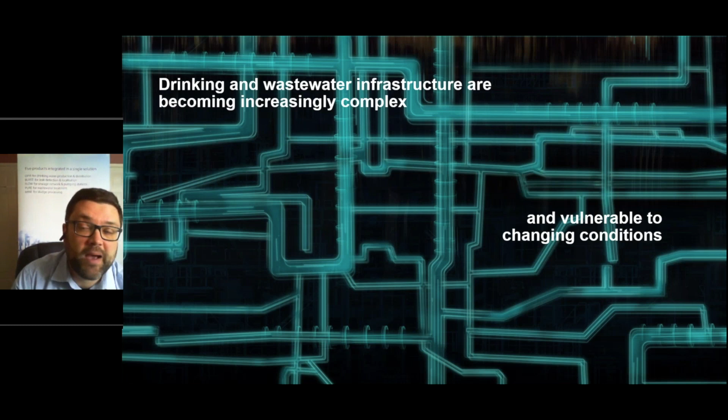And if you couple in the effects of climate change, such as drier summers, often shorter, sharper, more intense rainfall events, all of this change becomes more and more difficult to manage and to understand. Coupled to that, it's becoming more and more difficult to get skilled operators.

I visited a treatment works not long ago, and there was a guy in that treatment works who'd been working there for over 30 years. And he knew everything about that treatment works. His knowledge, his understanding was fantastic. What we don't see now is people coming into the water utility market and into those type of roles who are willing to spend 30 years on the same wastewater treatment works.

People like variety. The younger generation are starting to crave the ability to move from role to role and use those transferable skills, which is great. But what it does mean is that your skilled operators, people who are willing to be there 24/7, working nights, working days, working weekends, are more and more difficult to find.

Particularly now, I heard statistics the other day saying that a quarter of the workforce for some utilities in the UK are self-isolating at home. It becomes more and more difficult to ensure you've got resilient operations with these conditions and with this changing workforce.

We see research saying that over 50% of water professionals will retire in the next 3 to 5 years. It's becoming more and more of a challenge to take those people you've got now who are operating your processes really, really well, and ensure continuity into the next generation. So 5 years time, 10 years time, where are we? How do we ensure that all the good things happening now are also happening in the future, plus additional benefits from data and IoT sensors and so on?

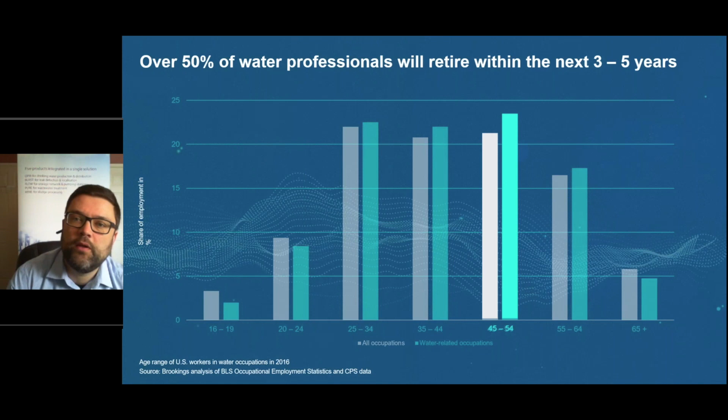So you've got all this data, you've got more and more data. People talk about IoT and the fourth industrial revolution, all these other concepts. Water utilities have got masses of data. They've got data going back 20, 25 years, and some really, really good data. The difficulty often is that data is siloed.

So you have data over here, which sits with the wastewater networks people. You've got wastewater treatment, you've got drinking water networks, you might have leakage departments. You've got all these different parts of water utilities. There's a real need to bring this data together. So if you know when people are using drinking water, that in turn helps you understand better when your treatment will be required for wastewater.

So how can you bring all these solutions together? How can you make the best use of all these new sensors people are putting out? And how can you adopt that technology to help you preserve the knowledge we've talked about when your operators reach retirement or become more difficult to find? How can you do that?

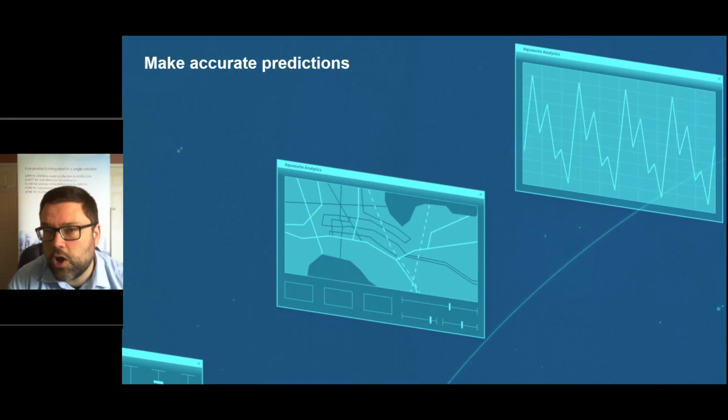And what we see is the concept that we coined however many years ago of that virtual operator, that software package, which can bring together the domain knowledge from the operators, the software expertise from the developers, the AI understanding from the data scientists. It can build up those rapid connections. It can start to make predictions of what's going to happen, and it can help you anticipate changes. So you can see that consumption's changing. You can see that the levels in sewers are starting to change.

You can see that your treatment process is becoming more unstable. If you've got that virtual operator, that whole concept of somebody or something being able to predict what's going to happen, anticipate when things will change, and give better insights to operate the network, but also be able to automatically react to those changes, that will give you a massive step change in resilience, performance, and efficiency.

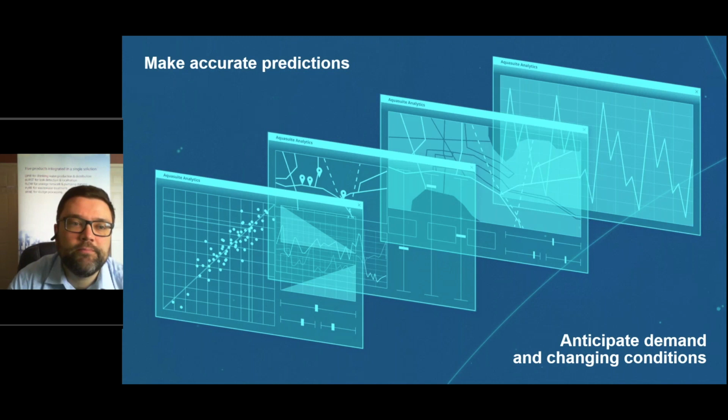Within the AquaSuite team, most of us are water people, so we're very passionate, and we believe that data-driven solutions can move and can help people get to that really resilient, reliable, efficient infrastructure. And that's the goal that we have, to help water utilities move along this journey to ensure everything stays exactly as it is now, as good as it is currently performing, but with added efficiencies and with added resilience. And that's what we think the concept of the virtual operator is.

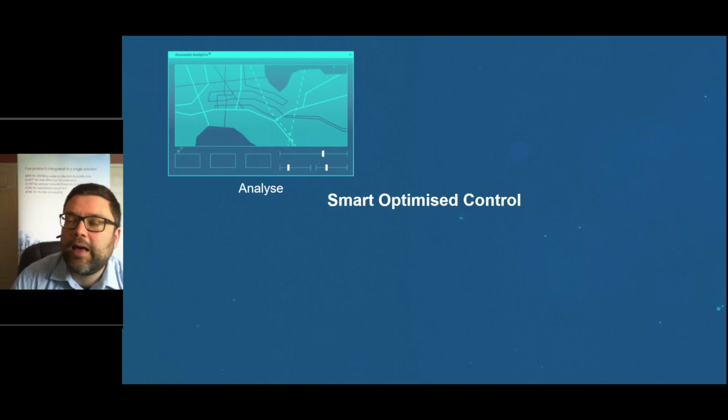So it's the ability to foresee what's going to happen and make your desired outcomes happen. And we break it down into 4 different parts. We call it smart optimized control. The first one is analyze. It's bringing together all that data from all those silos we talked about, from wastewater treatment, drinking water treatment, DMA flow meters, wastewater level sensors, all of that stuff. Bring it all together, analyze what's going on, and in turn use that to predict what will happen.

And that's one of the big benefits you get from automated optimized control using machine learning as opposed to feedback systems. It gives you an understanding of what will happen. If you have an understanding of what will happen, when people will use water, when they will flush their toilets, you can in turn start to look at when things don't happen as they should do, in case of a leak or a pollution incident, or you can use that prediction to start to control your processes better. So you get this learning, you get this better understanding of the process and what's going on, and in turn you can use that to optimize and control your processes better.

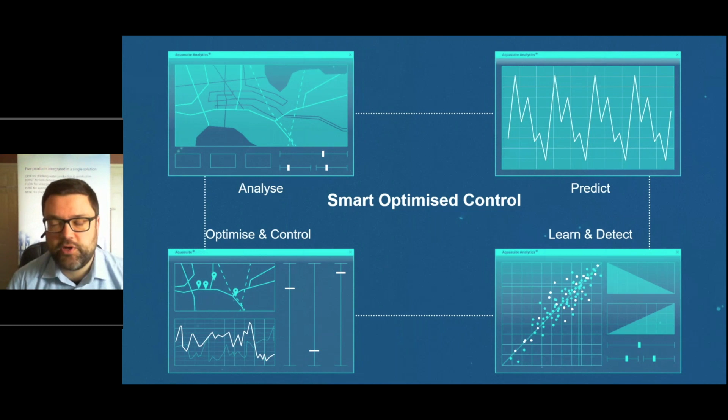So that's the aim of the virtual operator as we see it, being able to pull together all of that data. And don't get me wrong, your human operators can do that too. Your human operators are very able to bring together all those different data sources, but you need an awful lot of them. And you also need them to be there 24 hours a day, 7 days a week, 365 days a year. And what the virtual operator does, it takes those repetitive tasks, that ability to spot differences, predict what's going to happen from humans, puts it into the software and enables you to get the benefits of your best operator 24 hours a day.

And that kind of leads us into our second poll, which hopefully Maha will launch for you in a second. What are your key reasons for using the virtual operator? So why do you think you could use the virtual operator? What are the benefits you'll get? And we've got 5 answers there for you to choose. The first one is to unburden operators. So take away all of these boring, repetitive tasks from operators.

Second one is to improve the processes in an effective and efficient way. The third one is to help you make better, well-considered decisions. The fourth one is to help you reduce expenditure. And the fifth one is to help you preserve valuable knowledge of your operators. So what we're trying to do here is just get an understanding of what you're trying to do and how you might get benefit from using a virtual operator. So I'll just give everybody a few seconds to put their inputs into that section.

Okay, hopefully everybody's had a chance to vote and we can then continue with the presentation, please, Maha. Okay, we're back live again.

So what we're going to do now is actually look at some examples of partly where we've used the virtual operator concept within our platform, but we don't want to make this a sales pitch. What I'm going to do is hopefully just look at some examples where we think water and wastewater utilities benefit from the virtual operator. And the key thing we're looking at is, where can a virtual operator help you improve efficiency, help you improve performance, and provide resilience and reliability?

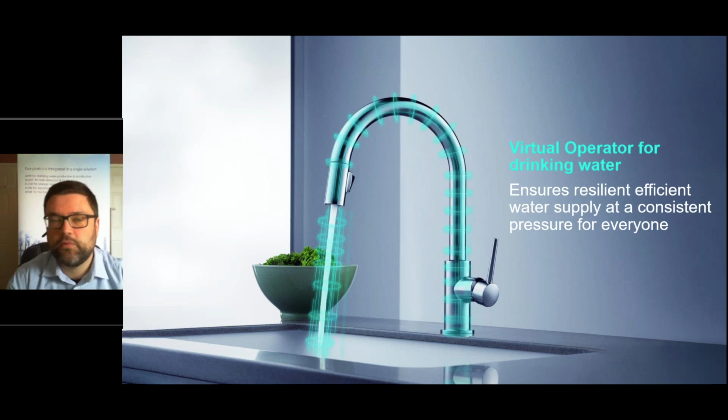And if we have that concept of the virtual operator, and that virtual operator is able to predict the demand for each one of those urban areas, in turn it can decide which source is best suited to feed the area in terms of efficiency. So you don't want to pump water too far away. In terms of water quality, you might find that some sources are softer than other sources. How can you blend all that water together? And the virtual operator is able to take all of that information, much like a human operator, and use that prediction to decide when you're going to pump water and where from.

And if you can use that methodology, and this is exactly how we started with AquaSuite back in the 1990s, predicting water demand and then using the artificial intelligence to decide how that demand is met, the secondary benefit you get with this real-time optimization solution is that the virtual operator can also react when things don't happen as they should. So if a pumping station fails or a service reservoir goes out of use, the system can start to dynamically reroute water to ensure your customers still get a water supply. And that's key. Everyone's mission is to supply that water. The virtual operator can help you supply that water efficiently, but also in the case of emergencies. And it can also provide that ability to react quickly to these problems.

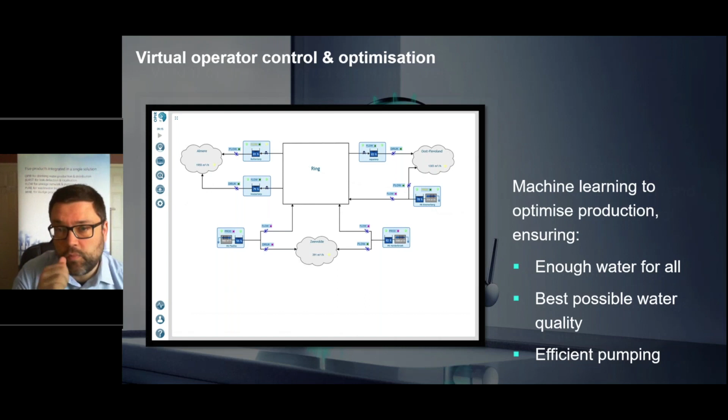Second example, and this is something a lot of companies have looked at over the years, reservoirs. So service reservoirs, they're great. Operations people love them, but they also love keeping them as full as possible. I was on a call a couple of days ago with a water utility, and they said that their operations colleagues would love to keep every single reservoir at 100% full or overflowing all the time, because it gives them that confidence. They know if that reservoir's full, no one's going to complain to them. No one's going to tell them there's an issue or a problem. They've done their job. They've got as much water in the network as possible.

But if you keep your reservoir levels as full as possible, that causes problems in other parts of the system. It means your pumps are going to be switching on and off. It means your water age within that reservoir, if you have a chlorinated water supply, becomes a problem.

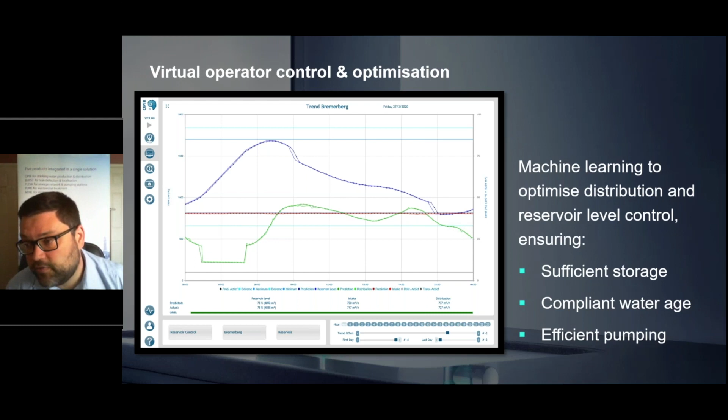And all of that benefit flows from having the certainty of prediction, having that ability to know exactly what's going to come out of your reservoir at any time. You then get that ability, that confidence, you can let your reservoir flex and let it go down to 40%, let your water recharge, which is better for water aging, and also better for your network as well.

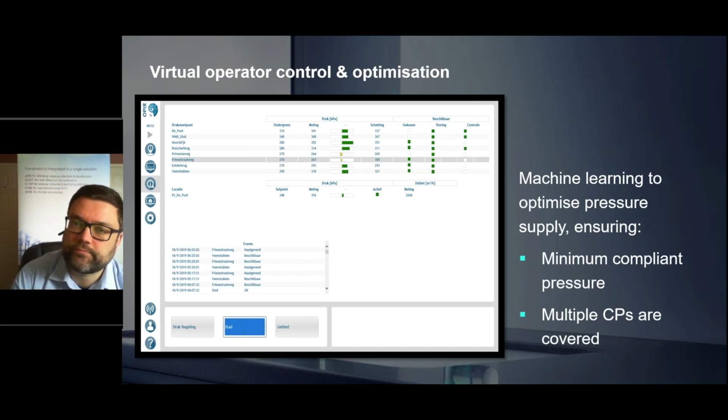So what does all this mean for you in terms of optimization? You get a more resilient network. Don't want to gloss over that because that's a really important point. So giving that resilience in terms of continuity, if your operators are not available or they're potentially reaching the end of their working lives. You get lower operational costs. So we've seen some really good benefits.

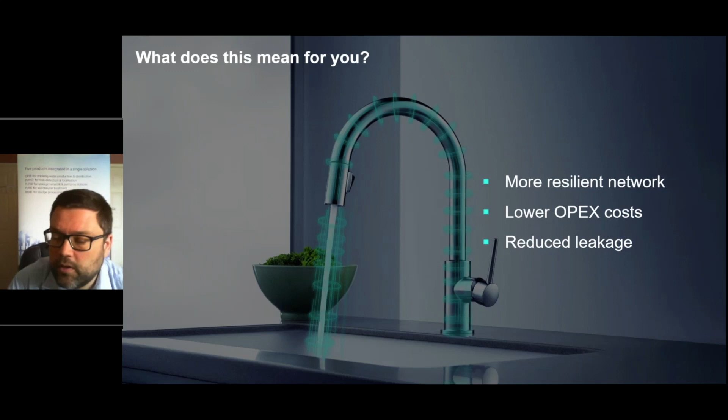Our largest customer on average saves around 7 or 8% energy using AquaSuite for drinking water. Doesn't sound much, but that's while still maintaining that resilient network. And that's averaged over the past, I think, 10 years. And you can reduce leakage. If you can reduce the pressure in the network, it's quite clear that you can reduce leakage and potentially the number of bursts you might get within your network as well.

That kind of leads us on to the next bit. And this is a solution where we're using the virtual operator to provide insights rather than to control the network. I'm not going to talk about this one in too much detail because we're actually going to host a webinar later on, which is going to look specifically at leakage and non-revenue water.

And this was a real leak from one of our clients. The leak happened. AquaSuite, the virtual operator, told them about that leak. They were able to get out, find it, and fix it all within 6 hours. And that's really impressive. The average runtime for leaks in, I think, the Western world can be 10, 11, 12 days. I certainly know of examples where quite considerable leaks have run for months, if not years.

So if you've got that ability for the virtual operator to tell you there's a leak, you can get out there, you can find it, and you can fix it. And that has multiple benefits. First off, it means that your water loss is less, which is great. It means you're saving energy. It means you're targeting your workforce. There's loads of benefits that come from being able to find those leaks and fix them quicker.

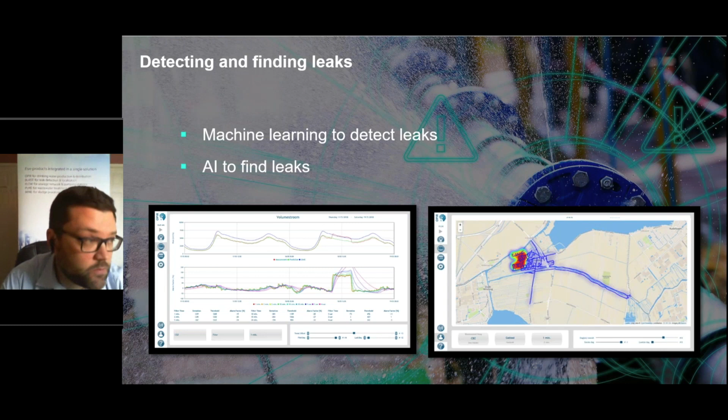The image on the right, which I'll just touch on quickly, is where we're using a hybrid AI hydraulic model to hotspot where a leak is. And what we do is we compare simulated pressure with actual pressure to work out the most likely location for that leak. And that enables water utilities, rather than send the leak detection crews to the whole DMA or the whole supply zone in some cases, to start in the area where the leak is most likely. And it just cuts down that time of being able to find and fix and repair the leak. But as I say, we'll look at that in much more detail in a later webinar.

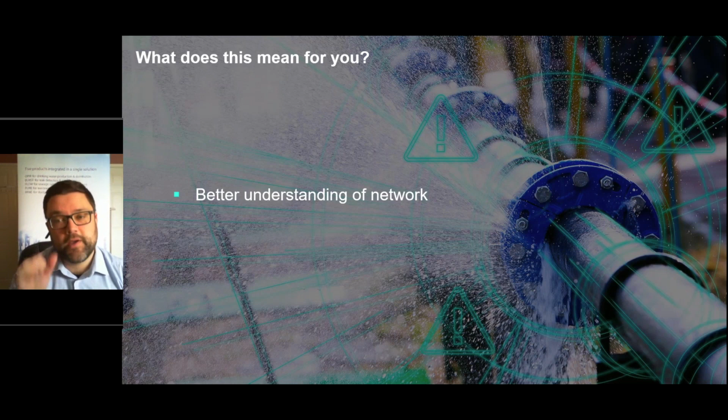And what does that mean for you? Better understanding of your network. Everybody, if you're a consumer of water, which I think we all are on this call, hates the concept of water being lost. So much better for your customers if you can say your leakage rates are 10% as opposed to 20%. It's much faster, which means efficient, and it's much easier to find and fix those leaks.

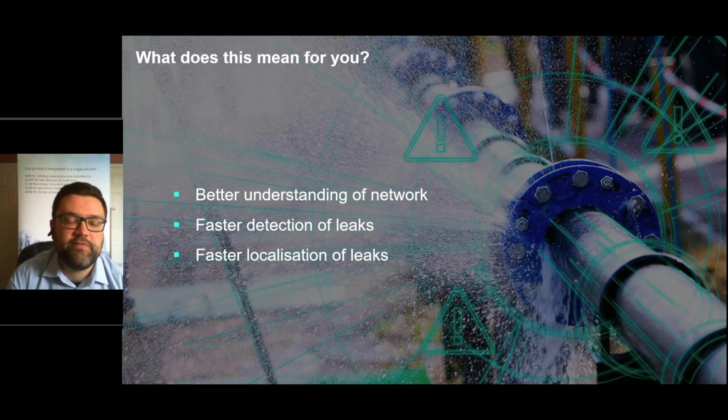So we'll move on to wastewater. To a certain extent, up until maybe 5-10 years ago, wastewater was a little bit of a forgotten child for some utilities. It was something which people had to do, and they usually did it very well to the extent they could. And what we've seen over the last 5 years, 10 years, is a real new focus on wastewater. So a focus on deploying more sensors in the networks, a focus on improving wastewater treatment efficiency, and within the last sort of year, 2 years, 3 years, a real focus on biosolids and recovery of useful materials from wastewater.

Wastewater is not just something to be got rid of, it's actually a resource that you can use to sometimes generate money, to generate revenue. And what we try to do with the virtual operator is to make that whole process of collection, transport, treatment, and reuse as efficient and as understandable as possible. So we're going to look at networks first. So collection and transport systems.

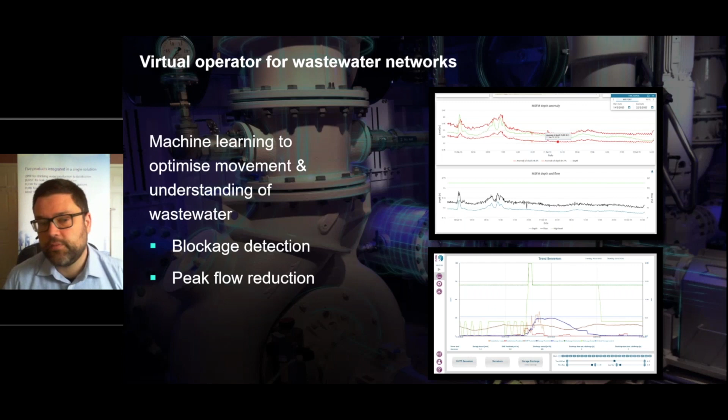So there's a big focus on carbon reduction. How can we have a no-build solution? How can we operate things without building more pumping stations, more treatment works? Which leads us on to treatment works. So everyone's talked about aeration within wastewater treatment works for years. It's a massive user of energy. Some people will say around 50% of all energy within wastewater transport and treatment. Some companies 60%. So it's a massive consumer of energy.

Essentially, you're bubbling air through sewage, and that's not an easy process. So it's a big user of energy, as are the other wastewater treatment processes. So you've got filtration, you've got aeration, you've got dosing. These are all complicated and complex processes. And machine learning and AI, the virtual operator, can really start to help you operate these processes most efficiently without the need for an operator there 24/7.

So we have clients who operate large treatment works, and they'll have one operator who might look after 4 or 5 treatment works, and these treatment works can cover 2 million people, 3 million people. They allow the virtual operator to take care of those repetitive day-to-day tasks, and they can then start to use their skills more efficiently in more productive tasks in terms of fine-tuning the benefit.

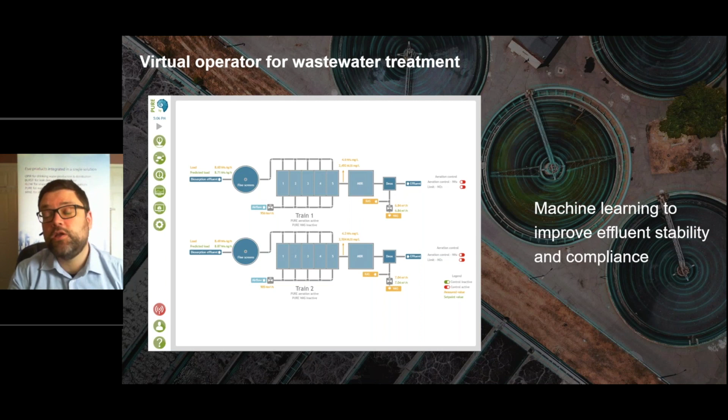So the virtual operator takes care of the day-to-day issues of how much aeration, how much dosing, what's going on when the thing's not working correctly, and the operator is then freed up to do the more complicated tasks.

Start with aeration. Everyone's been focused on aeration for a long time. What we're doing here is actually predicting the influent flow and load to the treatment works. And because we've got that prediction, we can then decide how much aeration is needed based on what will happen, whereas a lot of other systems are based on what has happened. So a feedback system will keep you within certain boundaries. A predictive feed forward system will keep you on the most efficient track permanently. And this is what we're doing here.

So you can actually see two lines very close together. That's the set point of aeration versus the predicted set point. And hopefully what you can see is that what we're predicting to happen is exactly what is happening. And that means that we can understand the efficiency of the process. Every aerator is different in terms of efficiency. So we use machine learning to understand what's the most efficient set point. We then decide which set point we should use based on the predicted influent flow and load. And that can save you 10, 15, 20% energy, if not more.

The key thing is, though, we're saving that energy while still ensuring your effluent is compliant. So we're making sure your effluent meets all your regulations. It's stable, which is important. Different countries have different ways of testing effluent. This type of 24/7 virtual operator will keep you on a stable effluent situation, rather than you having peaks and troughs depending on who's operating your systems.

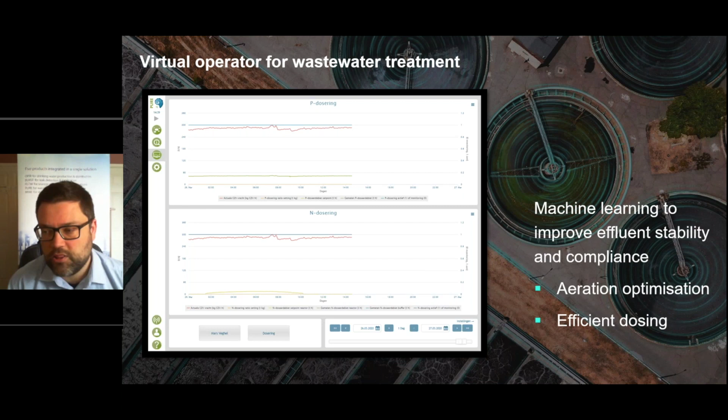And the same goes for dosing as well. So the amount that you dose, we will decide set points based on prediction of influent flow and load. We'll work out what's the most efficient dosing point and ensure that you don't overdose or underdose. So you maintain the constant or the most efficient amount of dosing within your processes.

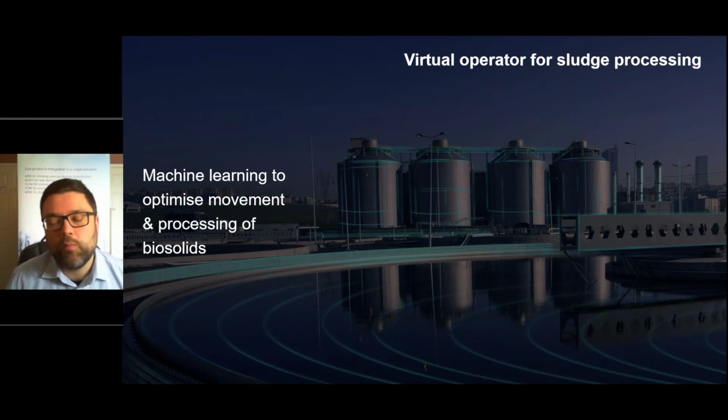But there's also now starting to be a movement to look at recovering other materials, such as phosphorus. We've got a limited supply of phosphorus in the world. Let's not burn it. Let's not put it into landfill. Let's try and get as much of it back as possible. And we see this particular area of sludge processing as really benefiting from artificial intelligence, the virtual operator, because it's so complex.

As an example, here is a deployment we've done in the Netherlands, where we've got an internal sludge line and we've got multiple external sludge lines. So we're starting to see this trend towards very large sludge treatment centers or very large recycling centers. I think one utility in the UK has two sludge treatment centers, and it has over 600 wastewater treatment works. So all of that sludge from those smaller works comes into your big works, where it gets processed and digested, and they extract the biogas and whatever other material they can extract.

But it becomes really complex in terms of managing the internal sludge line from the works itself, plus all of these external points. And artificial intelligence, machine learning, the virtual operator can really help you here. So it can start to say, right, we know these external treatment works, we know the levels in the buffers right now. We can predict what the level will be tomorrow, the next day, and we can start to schedule the movement of the tankers to ensure first that they're emptied when they need to be emptied, but also they're not emptied too often. And you can actually start to really manage the flow into the digesters to ensure constant flow into your digestion, which in turn helps you maximize your biogas yield.

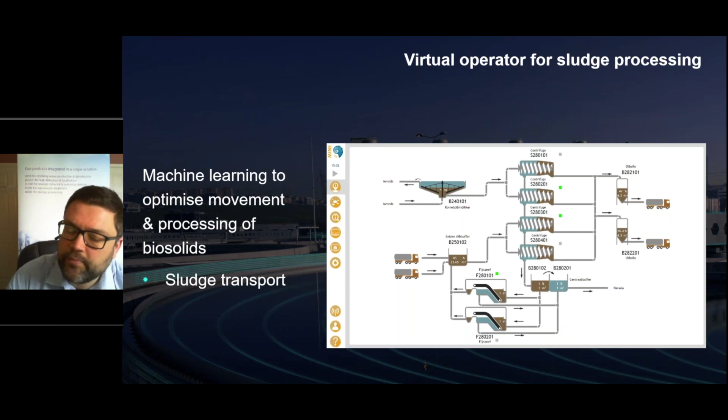So if you can do that, if you can manage the flow in from your internal line and all of your external buffers and make it as constant as possible into your digesters, you can really start to get maximum yield for your digestion.

And the second part of that, it kind of links to the first part. Sludge is wet. So you don't want to be tankering water around. You don't want to be putting wet sludge into incineration. You don't want to be spraying wet sludge, or too wet sludge, onto land. You can use machine learning, you can use the virtual operator, to understand how efficient your dewatering is, your centrifuges or your belt presses.

You can start to learn how much polyelectrolyte you need to add to get the most efficient dewatering processes. So your machine learning, your virtual operator, can be continually tweaking this process, you can see on the screen here. It can be continually deciding, okay, this is what's coming in. This is how much dosing we need based on that prediction.

This is the set point for your centrifuge to ensure the driest possible sludge out, but also minimum usage of energy and polyelectrolyte, because they're expensive. And that's the aim of not only the sludge line, but the whole process. It's ensuring you can meet your requirements to provide water, to treat water, to move biosolids as efficiently, as effectively, and as insightfully as possible.

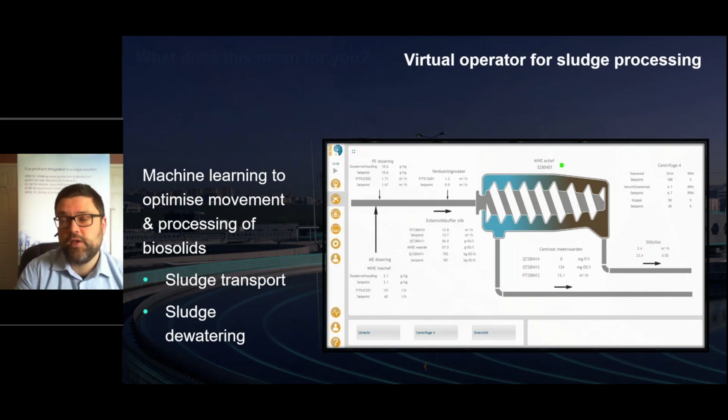And that's what we're trying to do across the wastewater. So we're giving you better understanding of your networks, trying to help you reduce spills, flooding, help you pump more efficiently, help you operate your treatment works more efficiently. The virtual operator is always watching. It's always reacting. It's always changing.

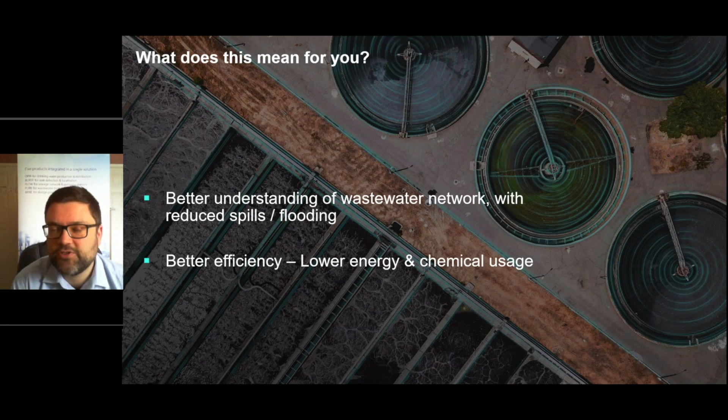He's always, or he or she, not sure. They are always there. They're always keeping an eye on your treatment works. They're always making sure they're operating as best as they can. And they can help you maximize your biogas production and lower operational expenditure.

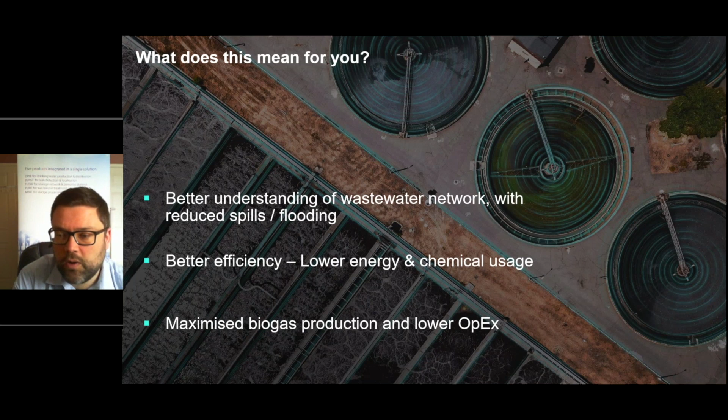So what we think is the virtual operator is there to augment your operators, to help your operations team continue the good work they've been doing, but with the ability to understand what's going to happen in terms of prediction, and also react as quickly as possible when things don't happen as they should.

And that leads us on to our final poll, which is, what area do you think would gain the most from the virtual operator? And hopefully Maha can launch the poll for us. So we've got the areas: drinking water production, distribution, drinking water network intelligence, wastewater collection and transport, wastewater treatment, or sludge processing. Which of these areas do you think is going to benefit the most from using a virtual operator?

So which of these areas will get maximum benefit from a solution such as AquaSuite, or such as an artificial intelligence, machine learning, optimization, or analytics solution? I'll just give you a few seconds to vote there. Okay, thank you. If we could come back to the presentation, Maha.

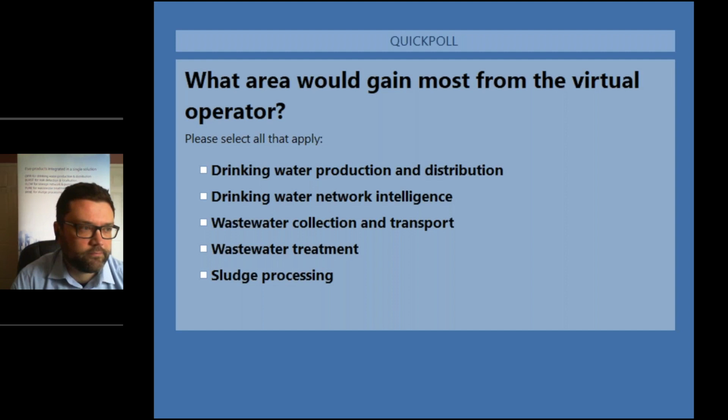There we go. So this leads us on to the final section, which is questions and answers, with Maha introducing the questions and Kim, our resident expert and veteran of AquaSuite, fielding the answers for you. Okay, I have question 1 sent to me by Maha. I will read it aloud. So can you give me a recent example of how the virtual operator has contributed to drinking water supply?

As Tom introduced to us, in the drinking water supply we've already been active for a long time, but a good example of improvement in recent times is that in one of our areas there was a leakage at night, and it was signaled right away. And not only was it signaled, but right away it was also taken into account in the prediction of the drinking water supply.

So the production was already raised at the site before the drinking water reservoir was empty, because it already detected that this leakage was taking place. So it was solved on both sides. In the distribution network, the leakage was found quickly, but the production was already increased. Not too much, only slightly, only compensating for the leakage, and that meant that we didn't have big variation in water quality.